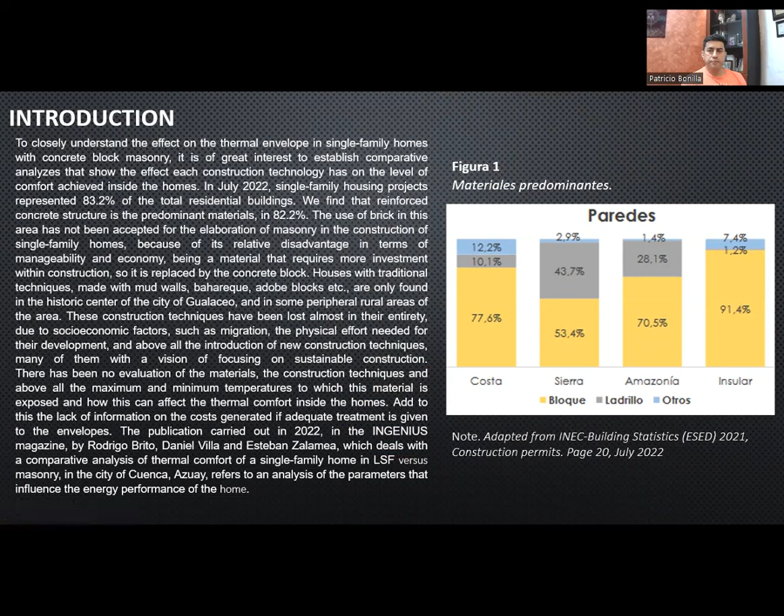The use of brick in this area has not been accepted for the elaboration of masonry in the construction of single-family homes because of its relative disadvantage in terms of manageability and economy, being a material that requires more investment within construction, so it is replaced by the concrete block. Houses with traditional techniques, made with mud walls, bahareque, adobe blocks, etc., are only found in the historic center of the city of Gualaceo and in some peripheral rural areas of the area.

These construction techniques have been lost almost in their entirety due to socioeconomic factors such as migration, the physical effort needed for their development, and above all the introduction of new construction techniques, many of them with a vision of focusing on sustainable construction. There has been no evaluation of the materials, the construction techniques, and above all the maximum and minimum temperatures to which this material is exposed and how this can affect the thermal comfort inside the homes. Add to this the lack of information on the costs generated if adequate treatment is given to the envelopes.

The publication carried out in 2022 in the INGENIUS magazine by Rodrigo Brito, Daniel Villa, and Esteban Zalamea, which deals with a comparative analysis of thermal comfort of a single-family home in LSF versus masonry in the city of Cuenca, Azuay, refers to an analysis of the parameters that influence the energy performance of the home.

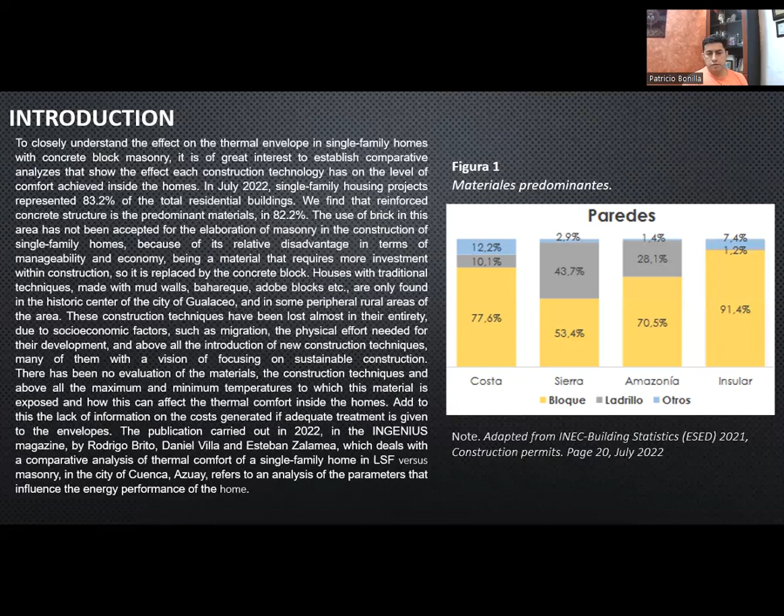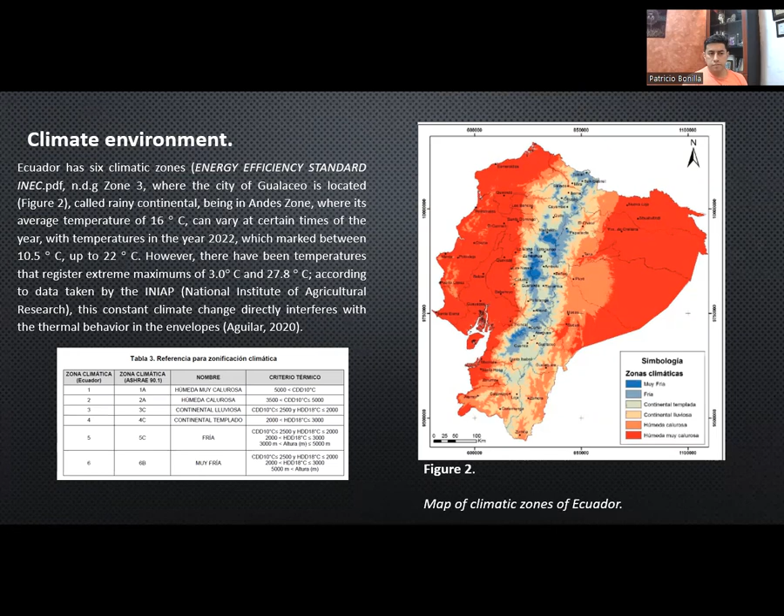Climatic environment. Ecuador has 6 climatic zones, and Zone 3 is where the city of Gualaceo is located, called continental rainy, in the Andean zone, where its average temperature of 16 degrees Celsius can vary at certain times of the year, with temperatures in 2022 which ranged between 10.5 degrees Celsius up to 22 degrees Celsius. Although temperatures have reached extreme maximums of 3.0 degrees Celsius and 27.8 degrees Celsius, according to data taken by INIAP, this constant climate variation directly affects the thermal behavior in the envelopes.

These variations directly influence the thermal envelope of buildings, either due to their location or also due to the material properties used in the different construction systems. Through the analysis and measurement of the climate in the city of Gualaceo, we will be able to make a comparison of the behavior of the thermal envelope in single-family homes, constructions that in a very high percentage are reinforced concrete portico structures, where the traditional masonry is the concrete block.

7 bedrooms with similar spatial characteristics have been taken as references in each single-family dwelling analyzed by measurements of indoor temperatures: 5 single-family dwellings made with concrete block masonry, 1 single-family dwelling with rammed earth masonry and bahareque, and another of brick masonry. The exterior temperatures of each house were measured simultaneously, using electronic devices for measuring temperature and humidity, with 3 readings in the same day. By means of the comparative method, it will be possible to analyze the behaviors of the thermal envelope.

According to the World Health Organization, the comfort temperature for people should be 20 degrees Celsius, considering that in our analysis we have referred to a specific and very important area such as bedrooms and the effect of material properties on the envelope.

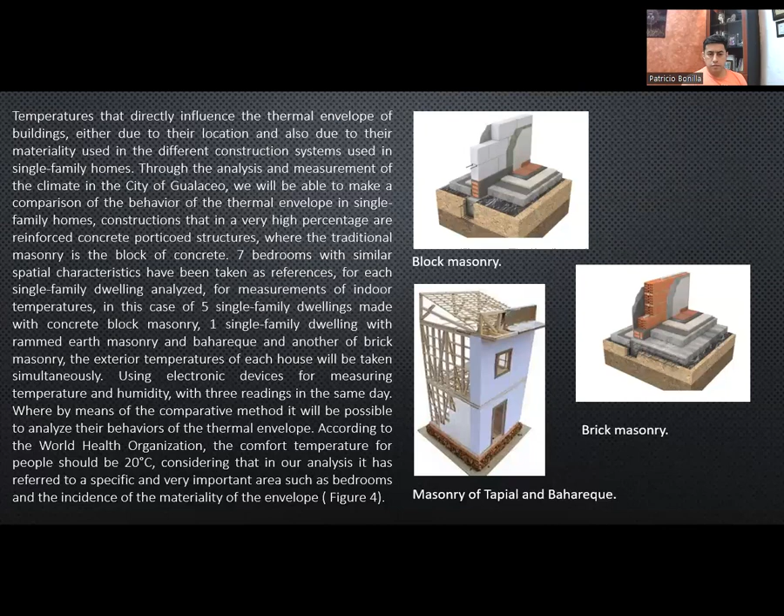Materials and methods. Once the parameters and characteristics that can influence the thermal envelopes have been established through their traditional masonry, based on this the energy performance within the houses under analysis is obtained, and with this we are able to determine the level of comfort that exists inside of them, taking into account the excesses or deficits which can be reached according to their material properties, such as the solar incidence to which they are exposed, and which set parameters of energy performance in each room.

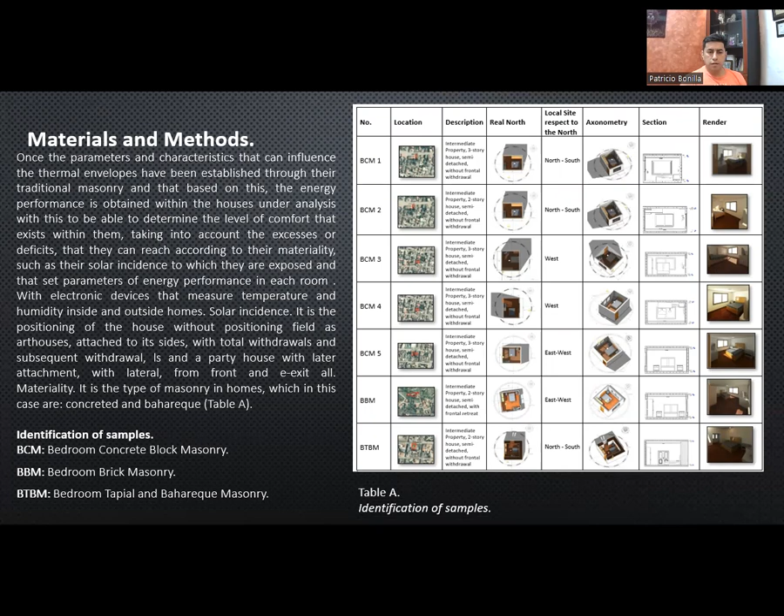BCM, bedroom with concrete block masonry. BBM, bedroom with brick masonry. BTBM, bedroom with tapial and bahareque masonry. Table A.

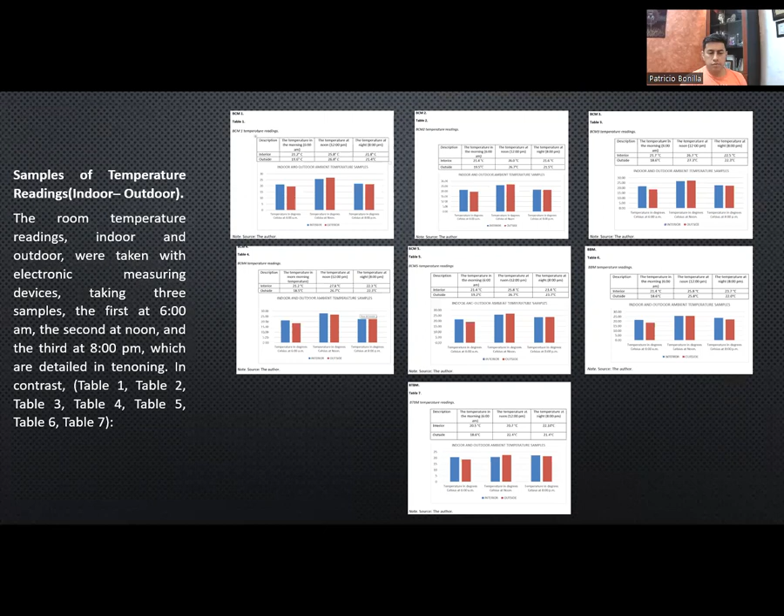Samples of temperature readings, indoor, outdoor. The room temperature readings, indoor and outdoor, were taken with electronic measuring devices, taking 3 samples, the first at 6 a.m., the second at noon, and the third at 8 p.m., which are detailed in Table 1, Table 2, Table 3, Table 4, Table 5, Table 6, Table 7.

Solar incidence. Solar incidence or solar radiation is an important factor for the thermal envelope in buildings, as solar energy is captured through windows or walls to maintain comfortable conditions inside the buildings and minimize the use of expensive and polluting air conditioning systems. Aspects such as the orientation of the building, the morphology, the materials used, as well as the location on the ground are controlled for.

In this way, we will be able to better understand the behavior of the thermal envelope of each dwelling analyzed. For this, within this study, the measure that we will adopt will be in Wh/m², which is the amount of solar energy that 1 square meter of surface receives. Peak solar hour is the energy we receive in watts per m², and this energy depends on the location and the time of year.

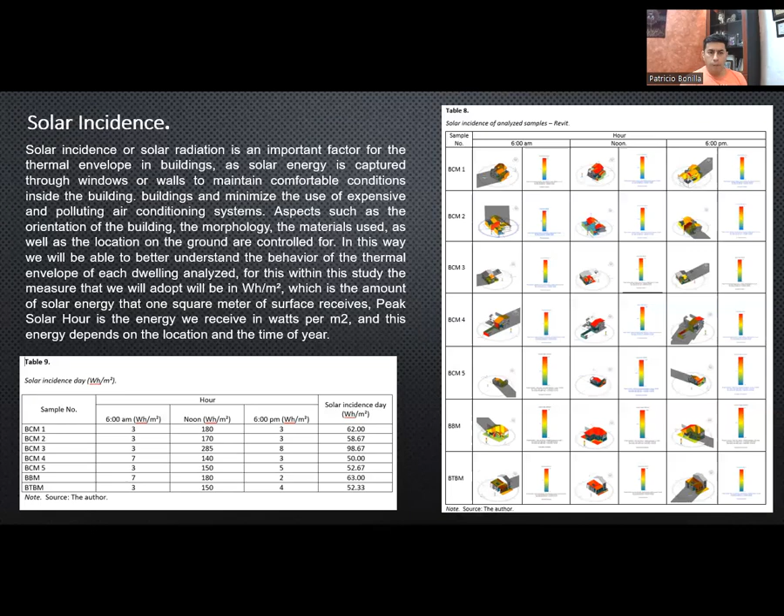Results. To obtain the results by comparing the behavior of the thermal envelope with concrete block masonry, through 3 temperature samples taken in 1 day, in the rooms of our analysis, the solar incidence has also been considered through the modeling and solar study carried out with the Revit software, highlighting that the samples taken were 5 with concrete block masonry construction systems, 1 with brick masonry, and the last one with rammed earth and bahareque masonry. For this, the measurements of each room were taken, determining its area in square meters, its volume in cubic meters, while the temperature is in degrees Celsius.

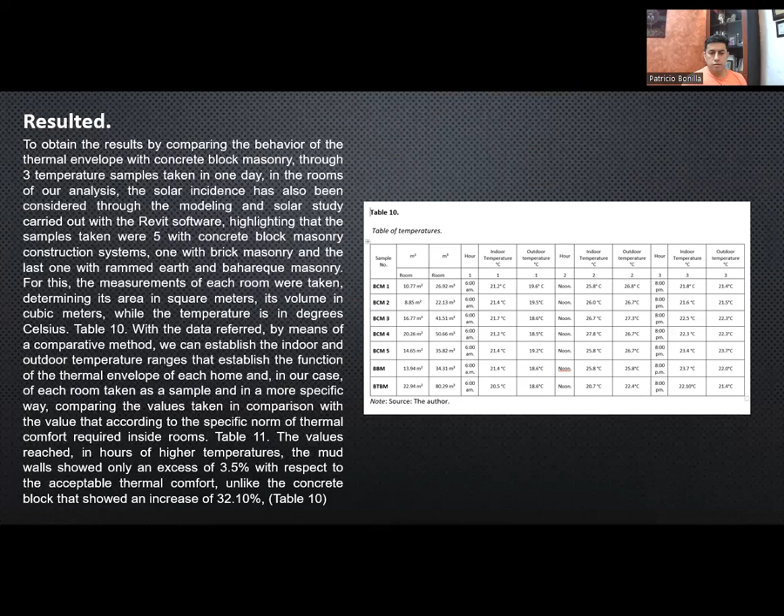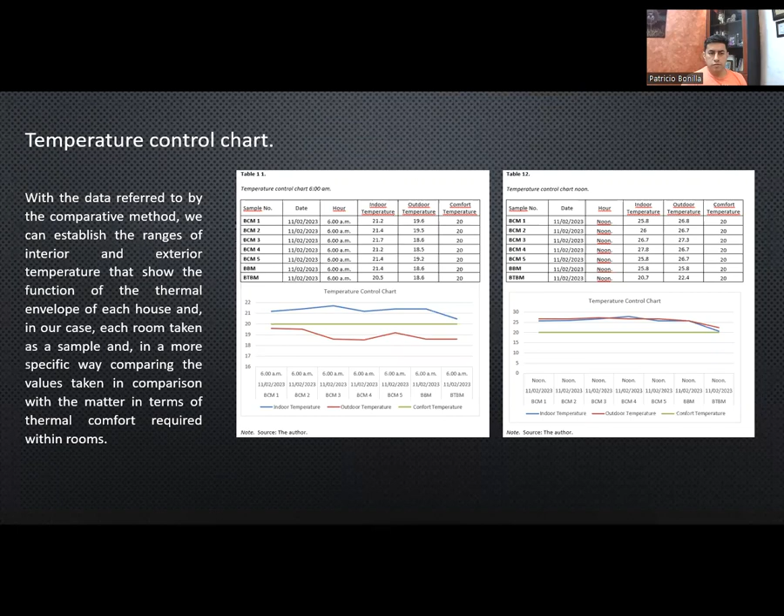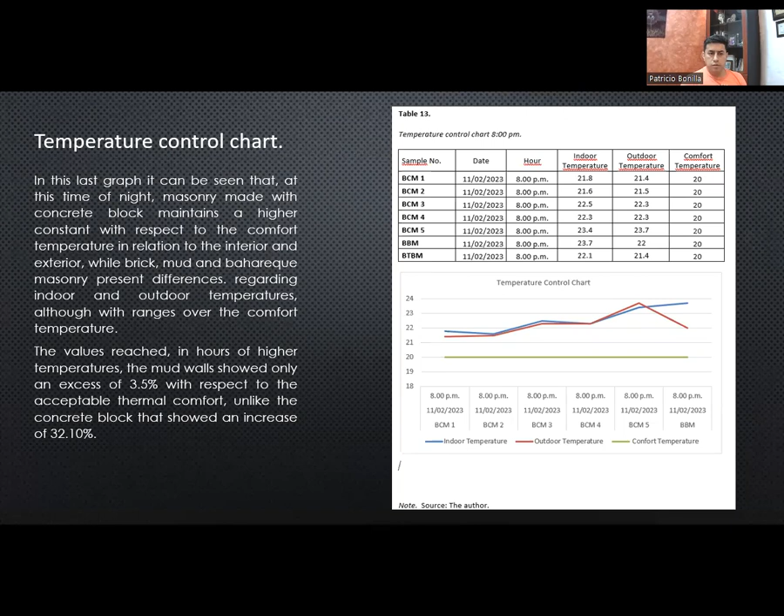Regarding indoor and outdoor temperatures, although with ranges over the comfort temperature, in hours of higher temperatures, the mud walls showed only an excess of 3.5% with respect to the acceptable thermal comfort, unlike the concrete block that showed an increase of 32.1%.

Discussion. In this last graph, it can be seen that, at this time of night, masonry made with concrete block maintains a higher constant with respect to the comfort temperature in relation to the interior and exterior, while brick, mud, and bahareque masonry present differences. Regarding indoor and outdoor temperatures, although with ranges over the comfort temperature, in hours of higher temperatures, the mud walls showed only an excess of 3.5% with respect to the acceptable thermal comfort, unlike the concrete block that showed an increase of 32.1%.

Conclusion. This analysis, through a comparison of the behavior of the thermal envelope in single-family homes with traditional masonry, has allowed a close observation of the reaction of the envelopes in terms of the weather, shape, orientation, solar incidence, and material properties. The concrete block has become the most used material in this area, but since it is not properly treated, it does not provide stable comfort inside the homes, knowing that temperatures can drop or rise categorically and that they can affect the thermal envelope.